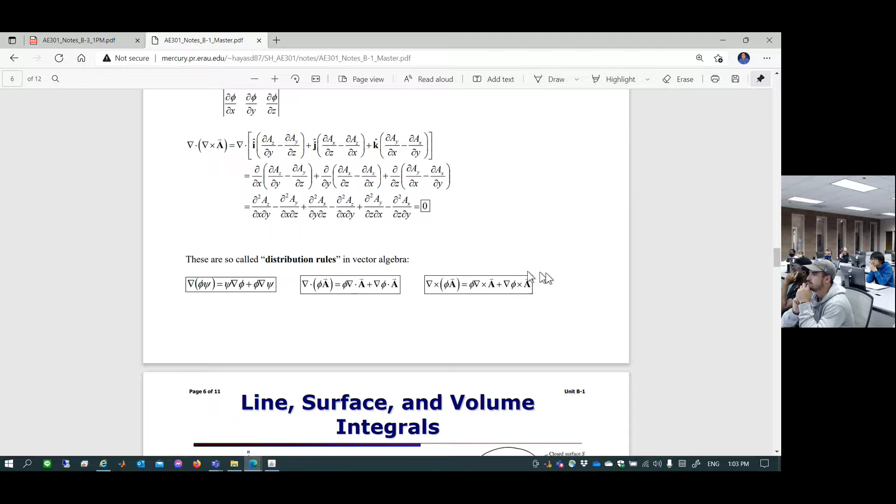Let's be specific. They're in B1, they're in like slide 3 or 4. Stuff like that, of course I'm gonna give it to you. Okay. But of course, if I give you those things, you probably need to be able to do this kind of thing. Suppose I give you, okay, find out this, you'll be able to carry on. And then those definitions, right? The operator, what is the definition? What is divergence? What's curl?

Those kind of things. However, I would expect you to know what the heck is divergence of the velocity field in continuity. What does that mean? How do you use that kind of mathematical expression to express what kind of flow field? Of course, it's obviously way beyond something you can memorize, in a mathematical sense. That's what I'm interested in. So that's why when people say, do I have to memorize? Well, of course, that's probably the minimum.

In other words, memorize in English sort of gives me the impression that, hey, I have no clue, but let's memorize it, I just want to pass this class. I have no clue, but I don't care. Let's memorize this equation and hope that's going to give me a passing grade. No, obviously not. So you don't have to memorize, but I would actually expect much more than just memorization. That's what I usually reply back to students.

Memorization is like, suppose you are taking a math class, you have zero desire to take that class, but somehow I need it, I have to pass, so I memorize. I have no clue after I graduate. Did you have that kind of feeling? I had that kind of feeling when I took flight mechanics class when I was an undergrad student. I memorized through, I got an A, I had no clue after I took that class. Of course, the teacher was pretty, anyways.

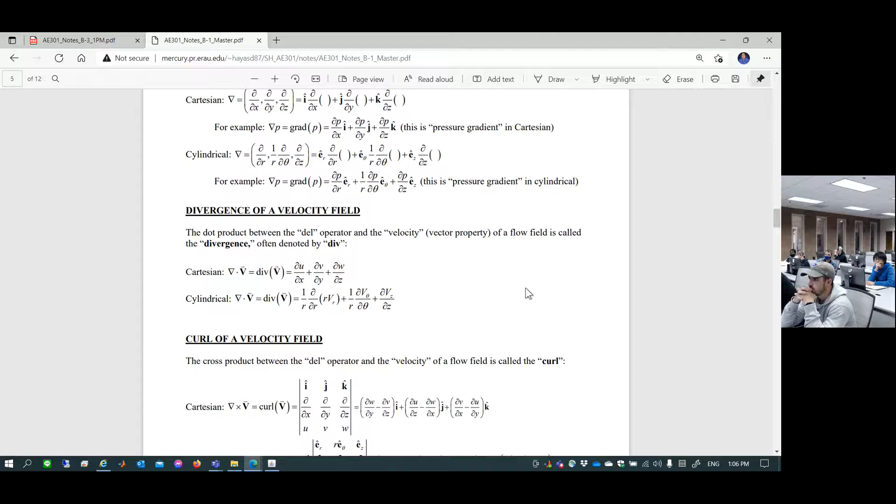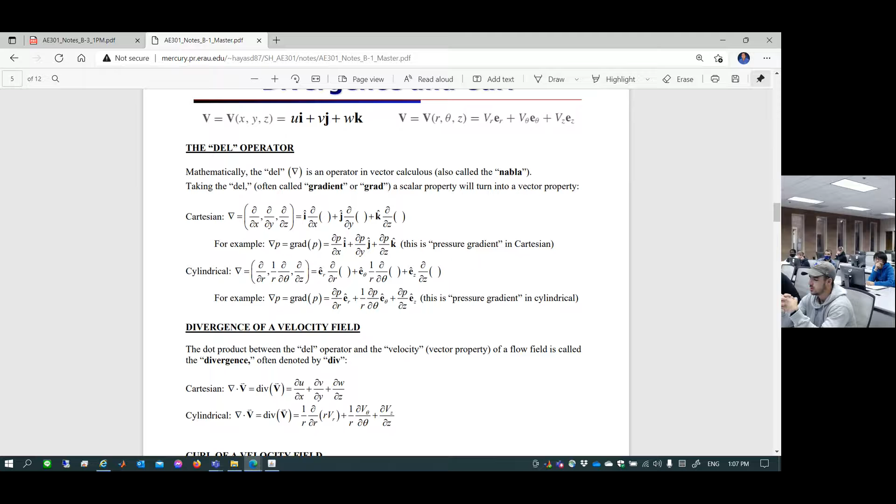So teaching something to someone indicates whether you really understand or not, because if people don't understand it, how on earth can that person teach you anything? Okay? It took me like 10 years to understand aero. So in the early days of my teaching aerodynamics at Embry-Riddle Aero, I probably didn't have much clue of what I was teaching. It's fact, okay? I try to be honest. So give new people a slack, okay? Don't be too harsh, even though they cannot teach. That's common. I was one of them.

Any question about midterm exam two? Professors grow because you are very good students. We appreciate that. Go ahead. Is B3 homework going to be due after the exam or before? I don't know. It depends on how much I cover today. So let's make a decision by probably Friday. You may argue back and say, Professor, you couldn't finish Unit B3, why don't you cut off the material you didn't cover? We don't want to see that in the exam. Or the professor may say, I don't care. Or you can push back successfully and say, the coverage is up to B2. It's up to you. I'm flexible. It's your exam. It's your education.

Go ahead. A similar format, 3 questions? Yeah, 3 questions. But each question could potentially have part A, part B, part C, part D, part E. If so, it's going to be 2 points each. Part G? No, it's not going beyond A, B, C, D, E. 2 points each is the maximum stretch I can do. I try to be reasonable, because that's what you see in homework, right? So if I happen to choose that kind of problem out of homework, you're going to see 5 questions in a problem, 2 points each. Any other question? I try to be reasonable. I'm not going to test something I didn't teach. That's a terrible sin a professor can commit against students.

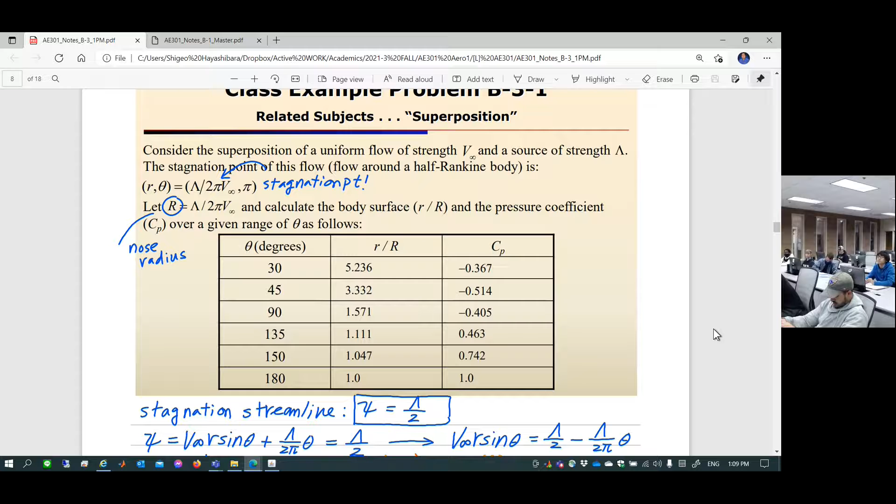We're gonna continue. Okay, Unit B3. So in Unit B3, we continue superposition of uniform flow and source. Let's just make sure what we're doing to begin with. So you are superimposing uniform flow, and this is the coordinate origin right here, point O. So at the coordinate origin, either Cartesian or polar, you are going to place a source. Magnitude is lambda. If you superimpose uniform flow and a source of magnitude lambda, you are going to create a flow field, something like this.

You are going to define a solid body in a flow field. So this is a solid body. This is something called a half Rankine body. And this is going to stretch to infinity. Okay. And in the simulated flow field, of course, you're interested only in the flow field around your body. So flow gets in, flows over it.

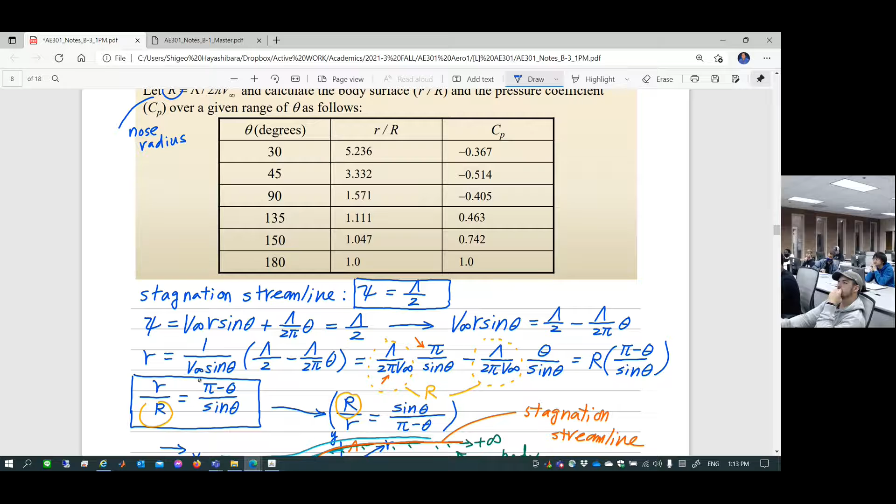Again, this equation is based on radians, so let's be careful. If you plug in angle theta for the range of 30 degrees all the way to 180, you convert the degrees into radians and plug into this equation to get r over R values. What does that really mean? Well, at theta equal to 30 degrees, r over R is this distance, little r, divided by capital R. It's just a normalized number, the data point here. 45 degrees, data point here. 90 degrees, 135, 150, 180. Those are the data points you compute as a function of theta.

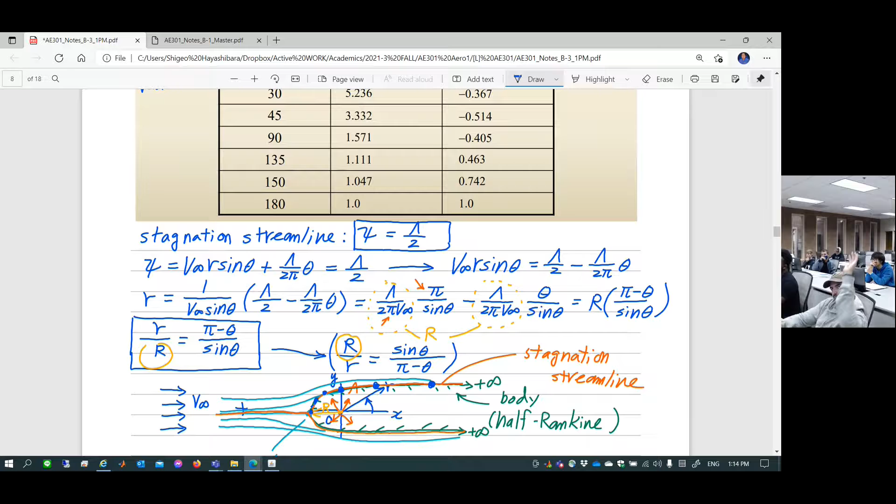This r over R is the normalized location of the surface points, normalized by the nose radius. By connecting those points with straight edges, you represent the shape of the body. That's what you have to do for task 1, project 2A. Now, before we move on, in last class I flip-flopped this ratio, little r over capital R, to capital R over little r. This is an extra step, and you're probably wondering why. You're going to find out today, hopefully. If you don't pay attention, you may not. I'm not going to tell you now, but you're going to find out.

Question? So r over R at 180 degrees, on the graph it's right here, that's 1? Yeah, this is 1, which is little r equal to capital R. So at all the other angles, is the distance from the origin to that point whatever the value is? Can you scroll up a little bit? So where it says 90 degrees, does that mean the radius from the origin to right up above is 1.57? 1.571, that's right. This figure is not drawn to scale, but it should be this shape.

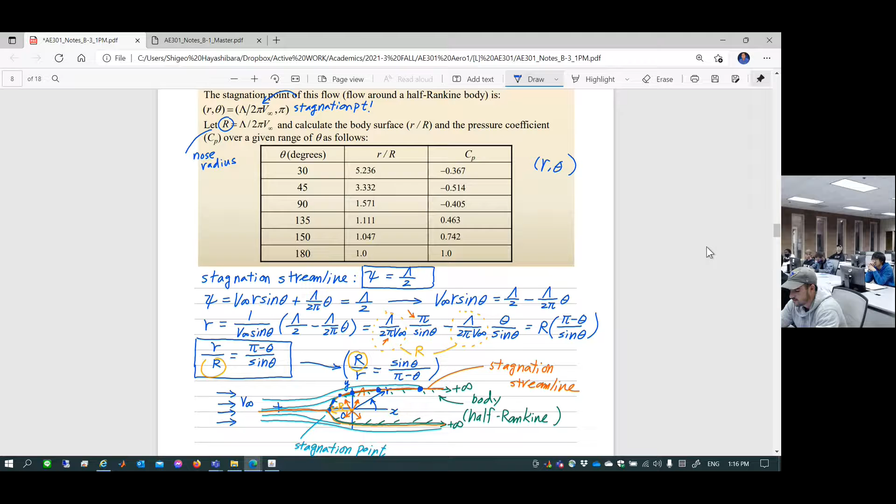Go ahead, Robert. For that code, the coordinate system, are we using polar? This is polar, yes. Polar coordinate is r and theta. So when we're graphing this in MATLAB, we're using polar coordinates? You can use either polar or Cartesian. You have to do a coordinate transformation though, if you want Cartesian. Okay. So today, based on this, those are the locations of the body surface. This is the equation of the body surface.

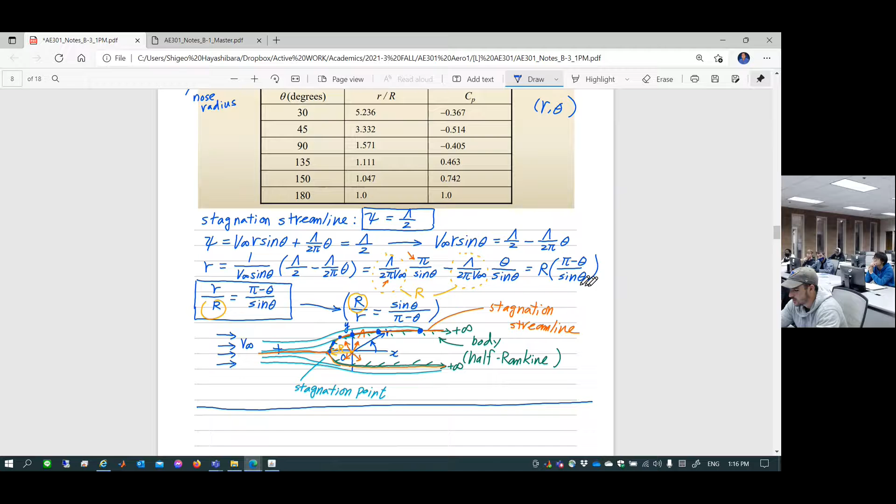Based on that, each coordinate of r over R, which corresponds to 30, 45, 90, blah, blah, blah, angles. What are the pressure coefficients? Let's find out. So let's begin with the pressure coefficient equation. What is it? That's right. So pressure coefficient Cp, original definition is P minus P infinity over q infinity. This is the original definition.

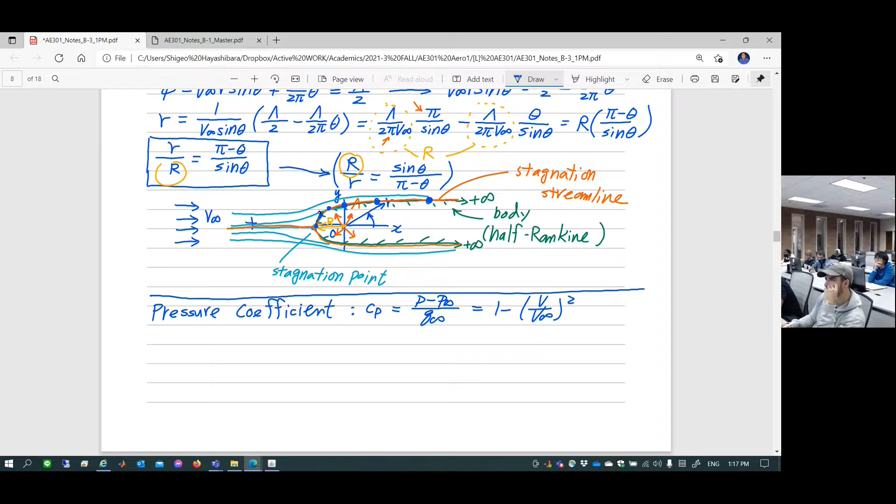Now this is a potential flow field. So this is 1 minus V over V infinity squared. So what you need to be doing is, what is the velocity here? Of course, it's 0. What is the velocity here? It's not 0. So you have to find out velocity at each location, and then plug that in here. Okay. So what is the velocity field?

Velocity field is, of course, Vr e_r plus V theta e_theta. So this is what? V infinity cosine theta, plus lambda over 2 pi r, this is Vr, plus V theta is minus V infinity sine theta. This is e_theta. So this is the velocity field given in polar coordinates.

So let's find out what is the magnitude. Magnitude is the square root of the square of each component. So you can say magnitude of velocity squared is equal to magnitude of Vr squared plus magnitude of V theta squared. So let's just take that and find out. The magnitude of V squared is: Vr is V infinity cosine theta plus lambda over 2 pi r, this thing squared, plus minus V infinity sine theta, this thing squared.

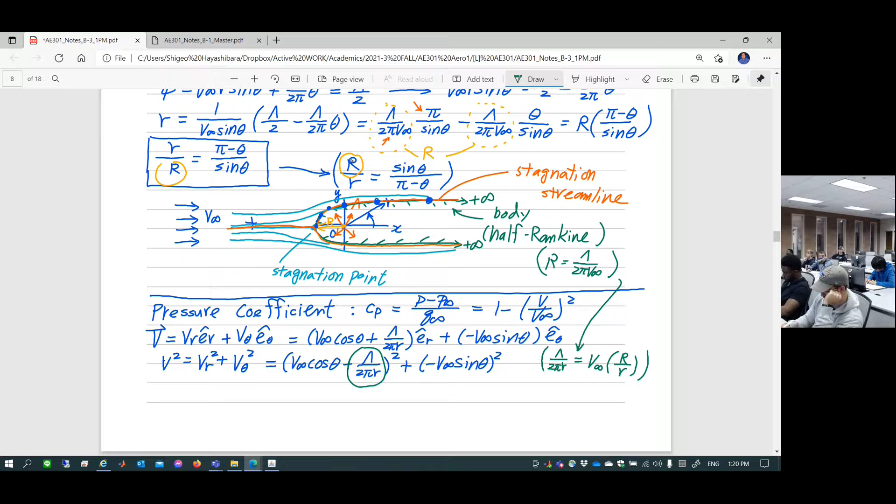This is V infinity times, what is it? Big R divided by little r, isn't it? Is that right? Yes. That's why I kind of flip-flop capital R over little r. That's the reason. Because the Cp equation is a function of capital R over little r, we have to flip-flop. A little bit of secret. Now you know. So now let's move on.

V squared is equal to V infinity cosine theta plus V infinity times capital R over little r, squared, plus, this minus goes away because we take a square, V infinity sine theta squared. So V infinity squared goes outside of the bracket. You put cosine squared theta plus 2 times capital R over little r cosine theta plus capital R over little r squared, plus sine squared theta, right?

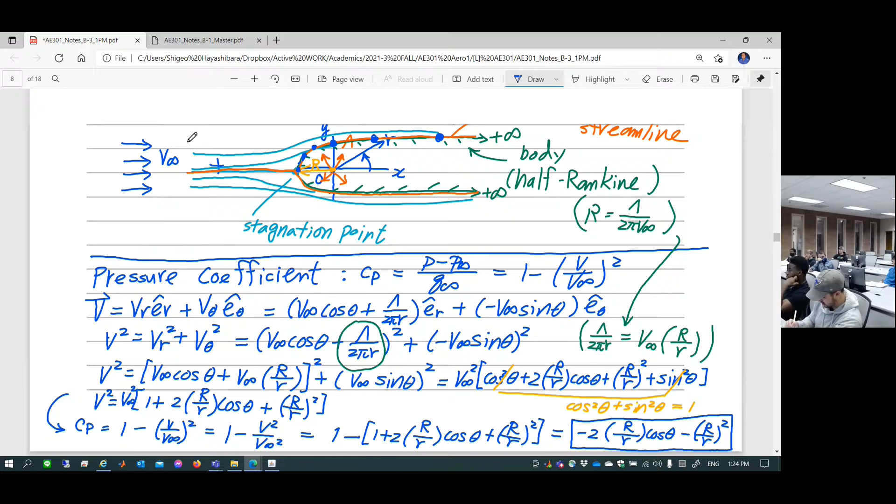That means it's not quite the same as first. Well, okay, I have to flip-flop this result, then use that flip-flop value inside of this Cp equation. That's why I have to flip-flop. Okay. All right. So if you use this equation and then plug in theta value from 30 all the way to 180, be careful, this is radian, you're going to have a result of Cp distribution over the surface at each location.

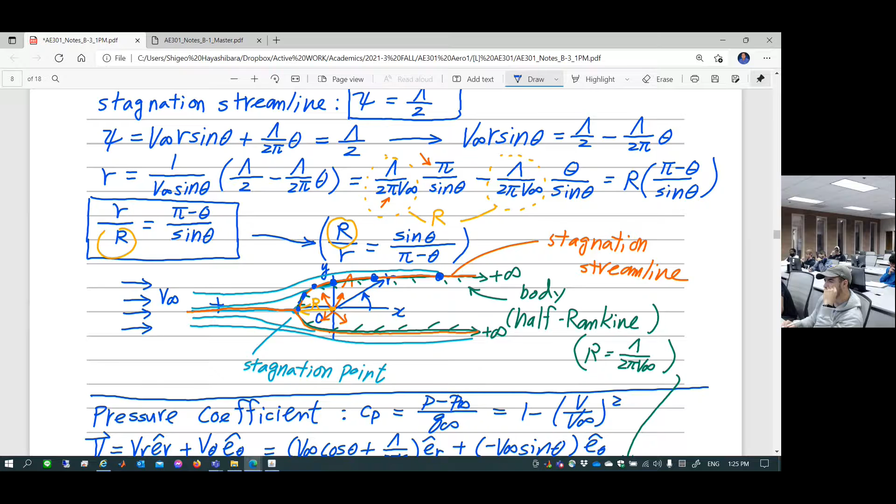Okay? So out of those 1, 2, 3, 4, 5, 6 data points over the surface, you actually compute the Cp distribution over the surface. Obviously, theta equal to 180, this is a stagnation point. Cp is equal to 1. 1 minus 0, so 1. Stagnation point. And then Cp cannot be more than 1. 1 is the largest value. Cp can be negative. Now, somewhere between 135 to 90 degrees, you have a location where Cp becomes 0, right?

What is the Cp equal to 0 point? What does that physically mean? Velocity is equal to free stream velocity. You can say that. And then pressure becomes what? Free stream pressure. Free stream static pressure. So this is called static port. You can make a blue one. Okay. So here's an interesting question.

Suppose I ask you to determine the location of the static port over the surface of the body. You have to find the location by setting Cp equal to 0. What is the corresponding angle theta? You can, of course, easily determine such a thing. That's called static port. I can easily create an exam problem saying, determine the static port location. Can you handle it? You cannot handle it unless you know and understand the concept, right? Again, next exam, I'm going to focus more on if you understand the concept or you have no clue, either way.

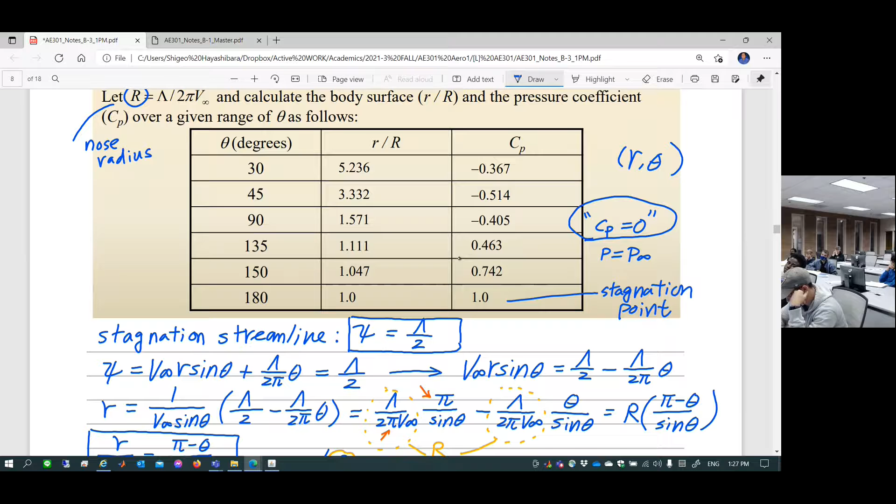Question? Okay, what did you just say about, you have to know the starting point? Starting point, what is the starting point? Or stagnation point, you're saying? Stagnation point, okay. We have to know that for the exam. Stagnation point is a velocity 0 point. You defined it and we found it, right? Throughout the mathematical process. We found it. Oh, we found it, yeah. We did it. You remember that? We found the stagnation point mathematically, right? So you can determine the stagnation point, of course, mathematically.

Okay. This is the whole point. Potential flow theory, 100% math: you can determine stagnation point, you can determine velocity field, you can determine velocity distribution over the surface. If you know that, you can determine pressure distribution over the surface. You can plot the Cp distribution over the surface. You can determine Cp 0 location, that is called static port. You can determine lots of things. Everything is purely mathematical. Okay. So by the way, let's take a look at a handout.

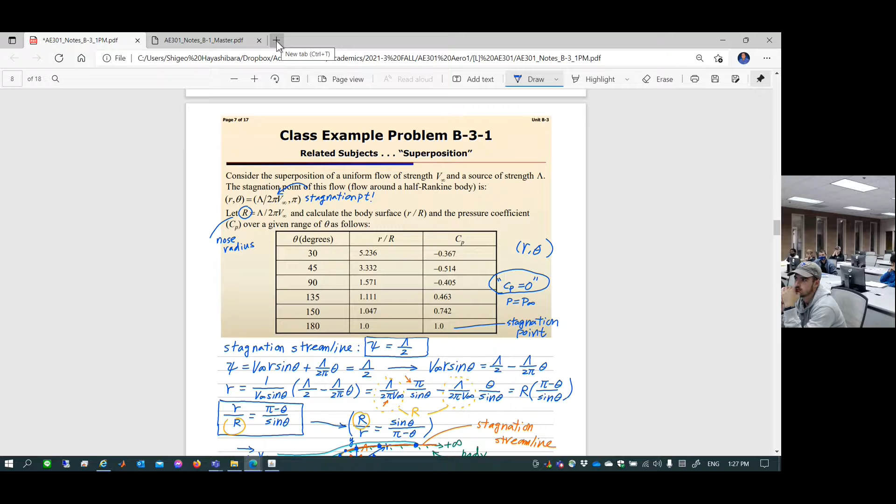This whole thing is given as a handout, okay? So if you are going to do project 2A, task 1, I think, you should look at this handout. Unit B3 handout. Which one? This one? Not this one. This one? Not this one. Sorry, Unit B4 handout. Unit B4 handout. Oh, okay. Sorry, be careful. Okay, Unit B4 handout. Sorry, I accidentally traced in Unit B4.

So if you are not here today, I guess you might miss it. Who's not here? Where's Peter? Anyways, it's your decision either tell him or not to tell him.

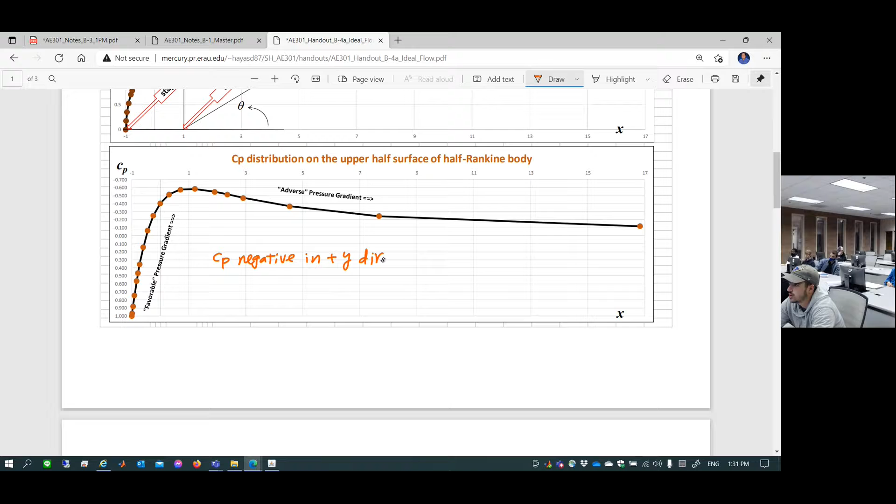Mm-hmm. Okay, that's fine. And then this is the CP distribution over the surface. Obviously, this is also completely symmetric on top and bottom surface. So CP equal to 1 at the stagnation point. So this is the plot of CP, negative value in positive y direction. This is, again, standard for CP plot in aero. Let me just introduce and emphasize that when you plot CP negative in positive y direction, this is the standard of aerodynamics.

I'm going to be super picky about this. If you don't follow this, I'm going to take huge points off. This is a standard of aerodynamics. Do you know why? Somebody please tell me why we have to plot like this. CP equals 0. And then what kind of information are you expecting to see in this kind of plot? This is pressure distribution. CP 0, and then CP becomes smaller value, and then smaller value, and smaller value.

Do you think pressure is increasing or decreasing? Pressure is increasing or decreasing? Pressure decreases as you move along the surface. This is called favorable pressure gradient. Okay? So it depends on the body shape. As the flow flows over the surface, depending on the shape, you are going to encounter either favorable or adverse pressure gradient. Which one do you like?

Suppose you are born as a small tiny air particle here, your life starts here, you hit the body, flow over, and then your life ends here kind of thing. Do you prefer favorable pressure gradient or adverse pressure gradient? Which one do you think you enjoy your life? Obviously favorable pressure gradient. This is your, I don't know, first day of freshman year at Embry-Riddle. Everybody's so nice as you move, you know, visit lots of occasions, people are so nice. You are very happily moving.

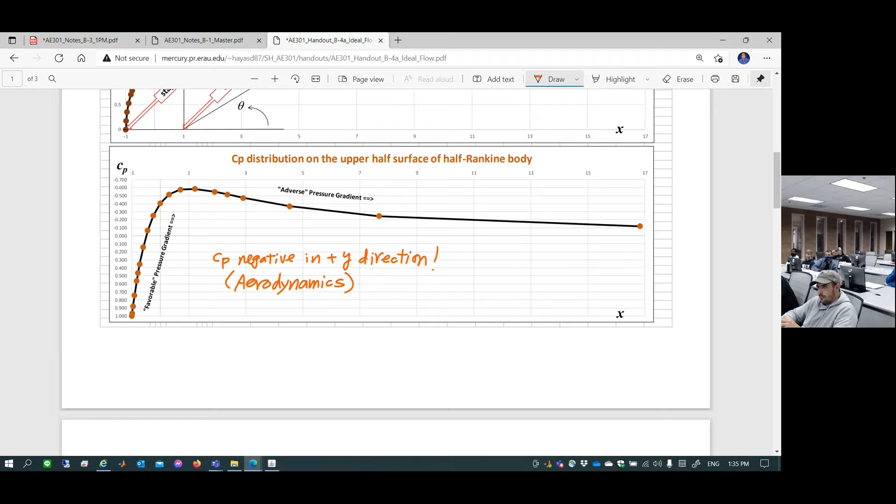But actually, depending on the shape here, though, you may have a chance to reattach later, and then somehow graduate. Anyway. Then you go visit the professor's office: Professor, I'm so sorry, I had a nasty attitude. I had too many things. Then the professor said, yeah, sure. Welcome back. I'll give you a second chance. Okay, anyways.

So that's something you can understand by looking at pressure distribution. Pressure distribution is everything in aerodynamics. So that's why you actually design the shape of the cross-section of a wing. Why do you create such a shape? You want to control the pressure gradient. Pressure gradient is essentially the shape you design. That is going to control the behavior of the flow field. If you do a poor job, you may induce early flow separation. If you do a great job, you may retain more laminar flow over the surface to minimize the cruising drag. It's a small, tiny thing, but it's going to have a huge impact.

So, anyways, why CP negative in y direction anyway? If you plot both upper and lower surface, okay? If you plot like that, if the pressure goes like this, it is going to indicate lower than atmospheric pressure. So again, later you're going to see CP distribution for flow over an airfoil, okay? Then you're going to see a plot like this.

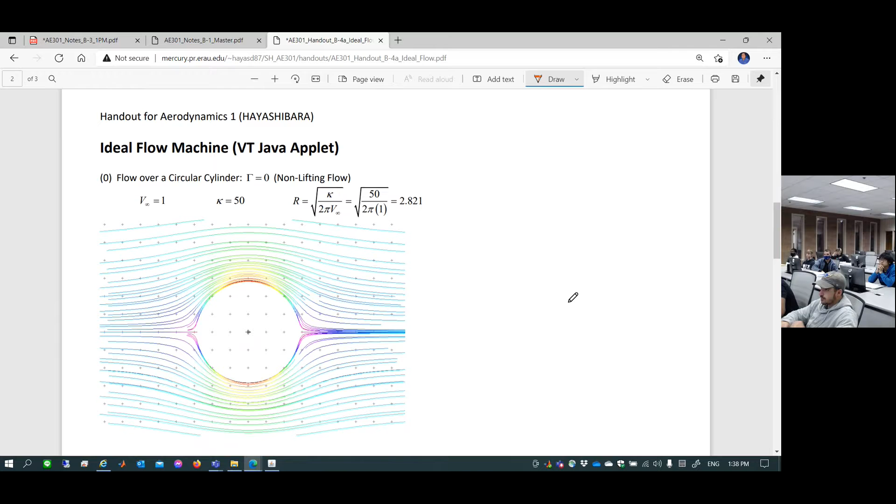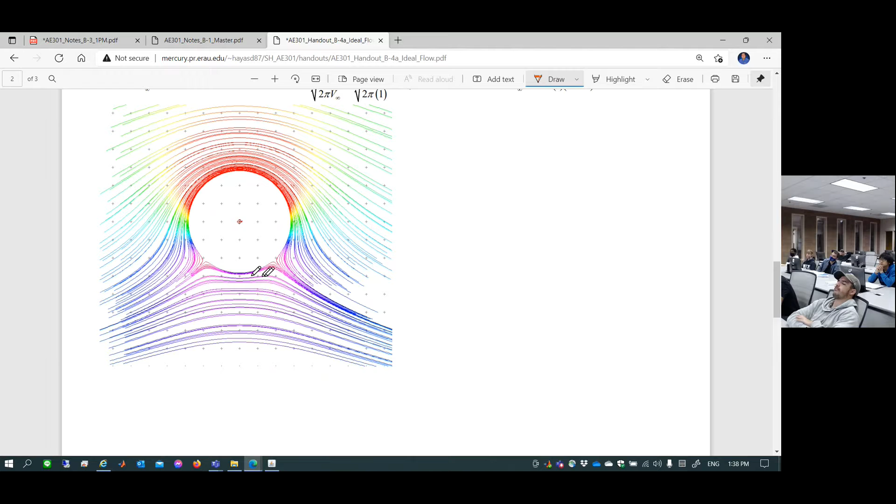Okay, so also this handout shows, hey, this is a mathematical toy I've been showing you. So this is an ideal flow machine. For the flow of a circular cylinder, this is the project 2A. You're going to plot this kind of thing in MATLAB. Of course, you can do it. Then suppose later, if you actually start spinning your circular cylinder, you're going to alter the flow field. So you are going to actually introduce the stagnation point here, moving downwards, and then stagnation point becomes here, and then separate from the surface.

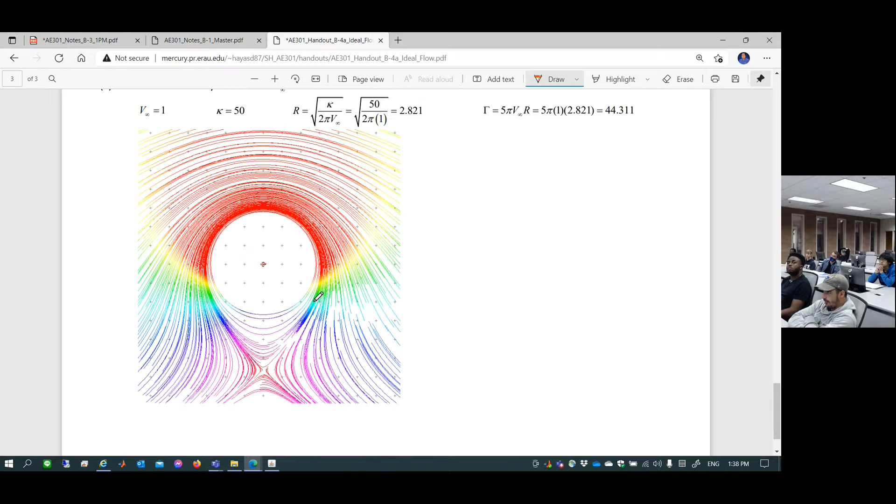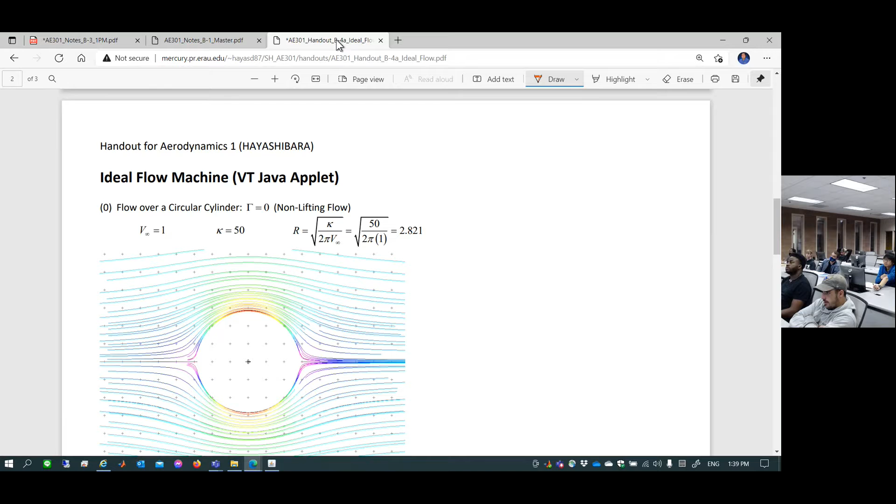Now this is the stagnation point. Now at that point, equation of the stagnation streamline does not represent the body surface. Okay, so you are going to see this kind of things later. But this is unit B4. Don't worry too much about it right now. It's just to get the B3 done. B3 is this thing. Okay. So take a look at the handout, okay? Let's move on.

Let's move on. So important thing about doing project 2A, please finish up your homework first. Without doing homework, do not jump right into the project. Homework actually makes you think and build the mathematical fundamental. Okay, so two more solutions of Laplace equation. We looked at uniform flow and source and sink. Two more. One of them is doublet.

Doublet is a source and sink actually at the same location. Left-hand side is source in this case. Right-hand side is sink. But doublet actually comes with a direction. If the direction of the doublet is in a negative x direction, you have to add the negative sign. Let's be careful. If you put the source on your right-hand side and sink on your left-hand side, it's going to be a positive doublet. This is actually, I'm showing, a negative direction doublet. Doublet's direction is negative x direction.

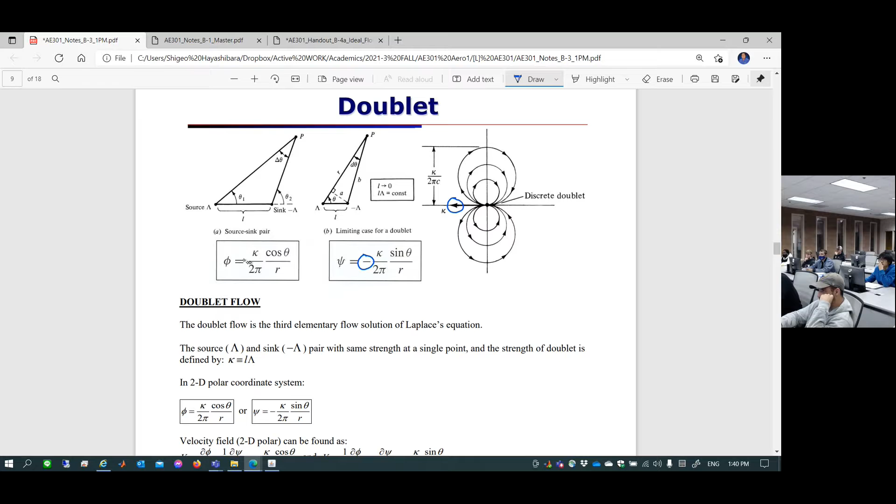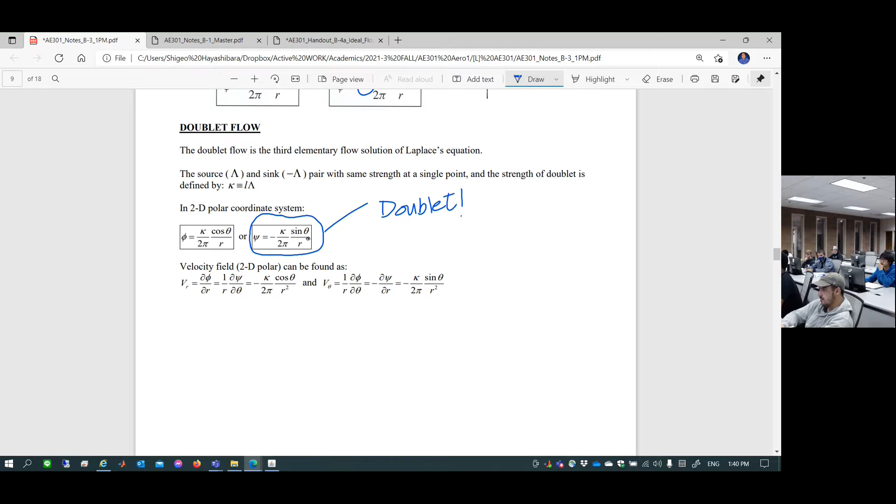Now, this kappa is a magnitude of the doublet. This is combination of a source and sink pair. Okay. So again, as usual, this is a solution of Laplace's equation called doublet. We're going to use psi, probably. And then, of course, once given psi, this is polar coordinate, right? R and theta based. And then you can determine velocity in polar coordinate system. Of course, you can do a coordinate transformation to completely transform this equation into x and y. Of course, you can do that.

Number 4 is a vortex. Of course, you looked at it already. So this is a point O, again, mathematical singularity point. And then vortex, we are going to define the direction. This is clockwise, yeah. Okay. Clockwise is positive. So if you see a vortex in this direction, it's actually negative. And then this is the solution of Laplace's equation called the vortex. Okay?

Now, I think you looked at one of the examples way before. I think Unit B2, trying to find out circulation, right? Do you remember the circulation equation? Circulation equation, somebody please? You guys did homework too. Yeah. Negative line integral over the closed path C, velocity dot product ds line vector, or negative integral over the closed surface S, vorticity del cross V inside, take a dot product with the S area vector. So this is circulation, isn't it? Yeah. Okay. Now, circulation gamma is the magnitude of this vortex.

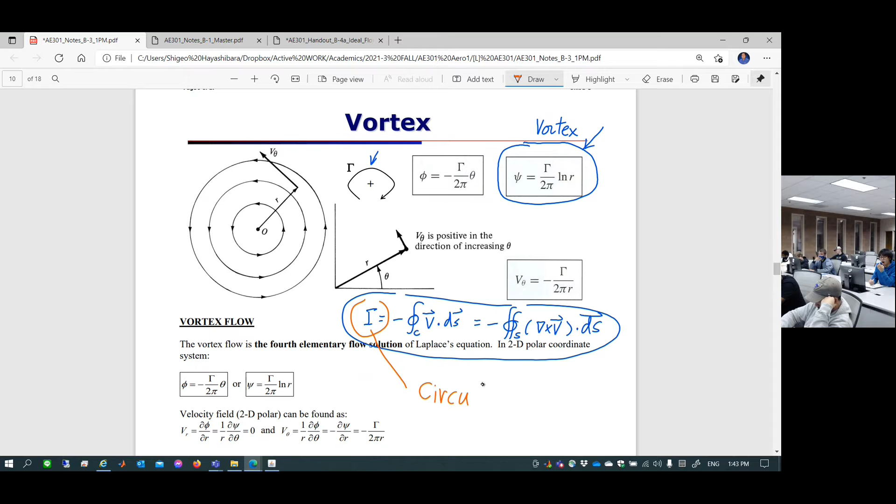Circulation gamma is a magnitude of vortex. Okay? So do you remember this? We did this, right? Recall unit B2. Do you remember that? Do you want to take a look at it once again? Let's take a look at unit B2. Unit B2, we did this practice. Circulation, yeah. We did that. Okay.

So you know how to integrate a line integral. Do you remember how to integrate to find out circulation? Integral over C of V dot ds. In this case, this is theta equal to 0 to theta equal to 2 pi, right? So this is negative integral from theta equal to 0 to theta equal to 2 pi. What is the velocity? Not V r, V theta only. V theta e theta, correct?

Because it's a vortex. Dot product against what is ds? r d theta. Right? Do you remember this? This kind of thing is something I want to test on you, because this actually brings you conceptual understanding, a yes or no kind of question. Then as a result, depending on the flow field velocity, you can determine circulation. Correct? You remember this?

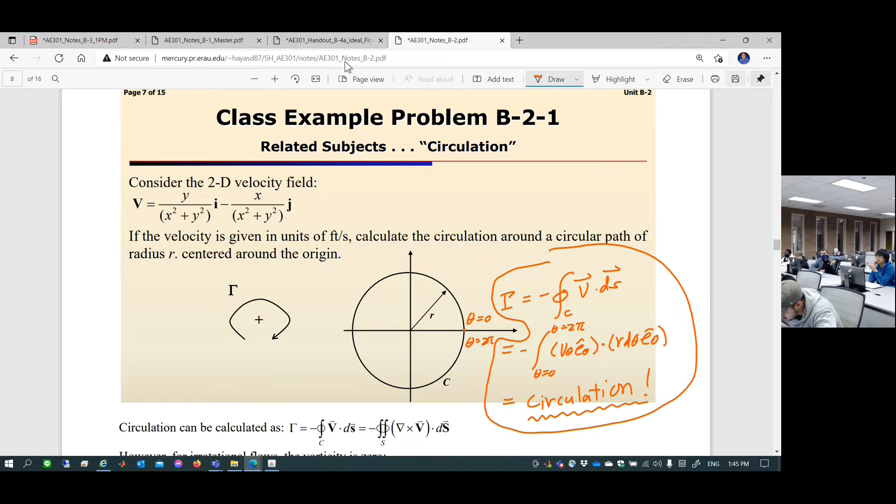And then you did the homework too. Homework was this kind of flow. Line integral, this kind of integral. Either way is fine. One is easier to do in polar, one is easier in Cartesian. Anyways, having done this, let's go back and take a look once again here. So this is exactly what you're seeing here. This is negative integral from theta equal to 0 to 2 pi of V theta e theta. This is velocity V. This is ds.

Then finishing up this integral actually gives you the circulation. Circulation is basically negative 2 pi r V theta. This is circulation of a point vortex, which is gamma. So picking up this solution of the Laplace equation, you can casually add the circulation to the flow field. That's what you're going to do in project 2B. You're going to try to spin the circular cylinder by adding circulation to it.

Any question here? So next class, we are going to superimpose uniform flow and doublet to construct flow of a circular cylinder without spin. Now, you can guess. If you superimpose uniform flow, doublet, plus one more, it is going to give you flow of a spinning circular cylinder, which is unit B4, what? Vortex. So if you superimpose a vortex with circulation gamma, you are easily going to simulate the flow of a circular cylinder with a different rate of spin.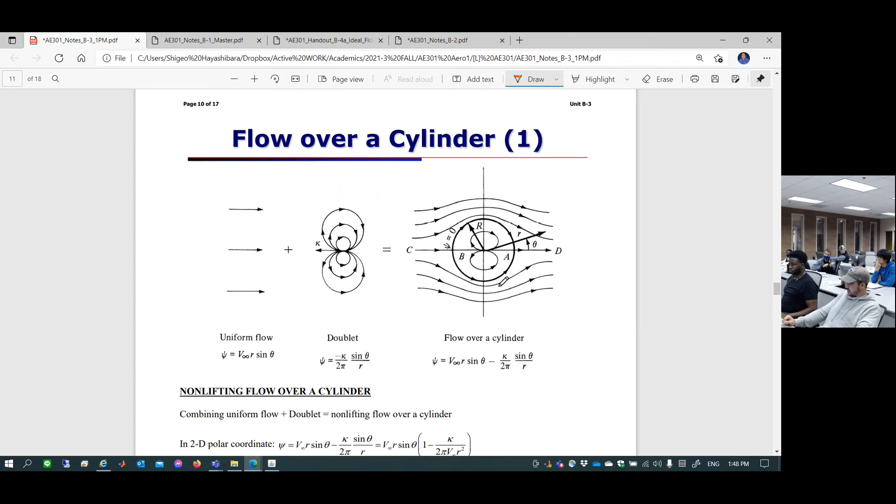Go ahead. Please scroll to the previous slide. Okay, let's go. Okay, yeah. It's too high.

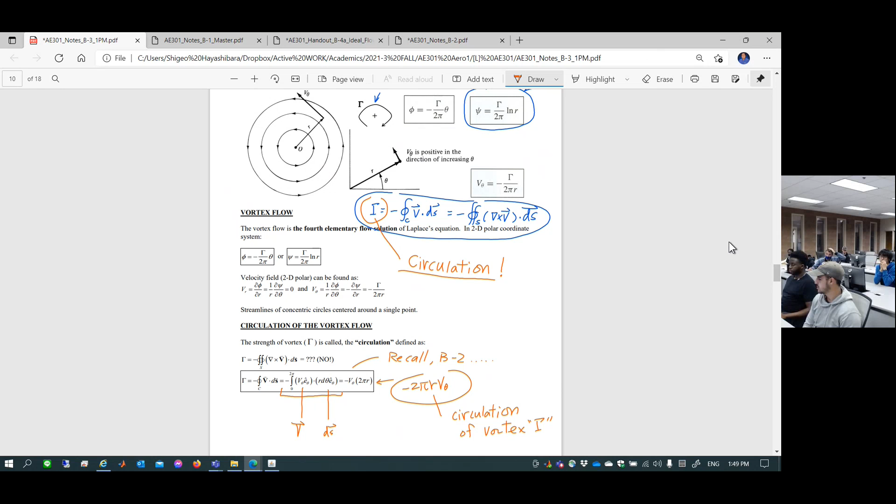That is homework, B2, the first thing or something. Yeah, it was like the first or second problem. I just wanted to recall why that was the case. Okay. Indeterminate integral, because you cannot integrate 0. The only thing you can say is some kind of constant. Any other question? But the integral is 0, so we know that. No, the integrand is 0, but the integral itself could be 0 or could be non-zero, some kind of constant. That's the only thing we can say. Okay, great. Anything else? Okay, we're gonna see you back on Wednesday.